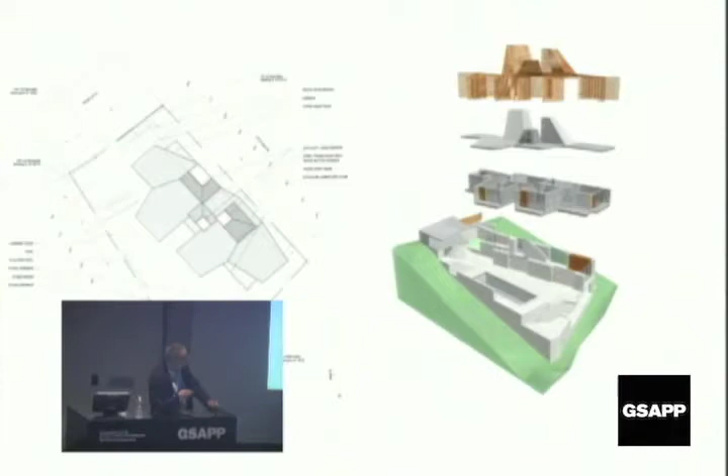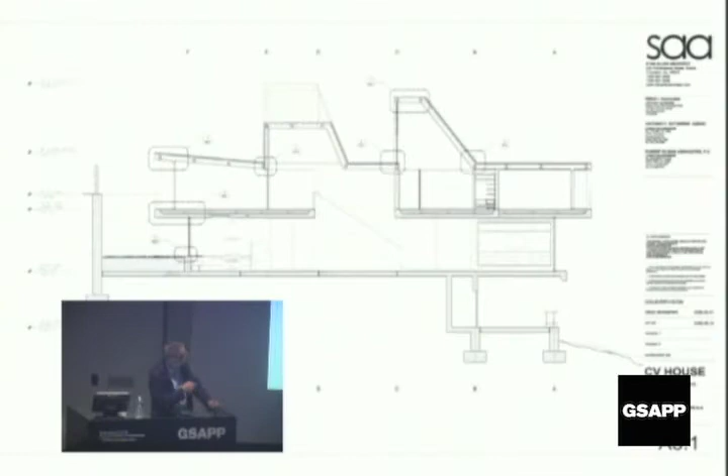The one thing that I will say about these projects, this is our house in Sagaponack from 2008, is this was coming off of the experience with landscape urbanism and the attention to the vertical, the kind of iconic presence of the building on the landscape, as opposed to seeing the building as an extension of the landscape, that was very important. This is an unbuilt house in the Philippines that was on a very steep site. You'd enter high. We created this intermediate level. And again, this kind of profile as you looked from the street was very, very important.

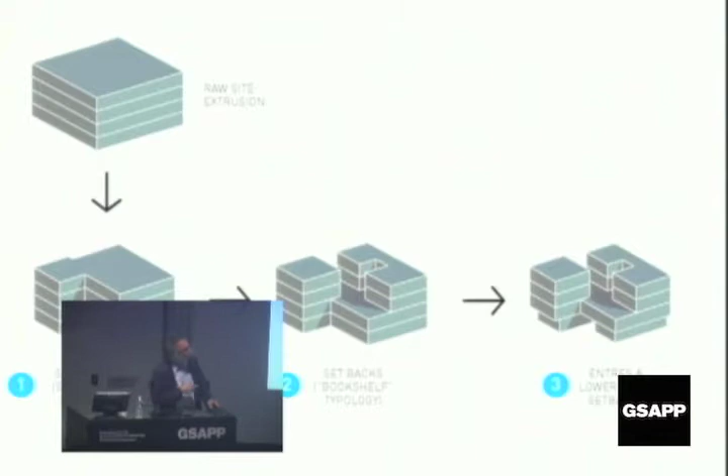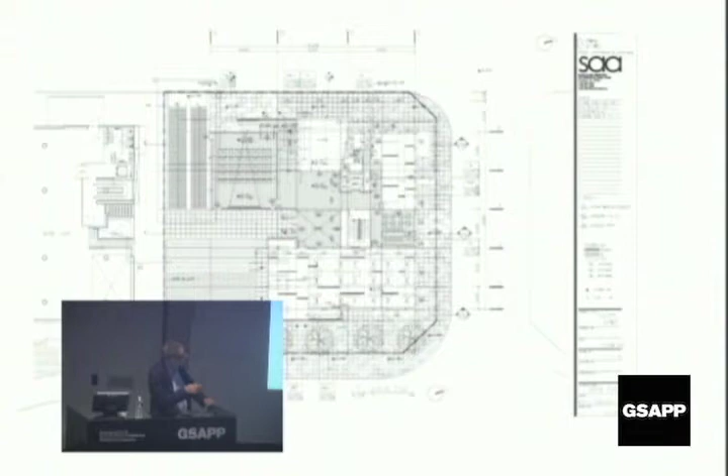Small office building that we did in Korea. And again, presenting this building in this context, you could almost see this as a process of erosion down to the final form of the building. One of the things we try and do, especially in an urban context, is not to enter at the perimeter of the building, but to bring people into the center of the building before you actually enter. So, for example, here you entered off the street this way from the courtyard here, and everyone came together absolutely at the center of the building.

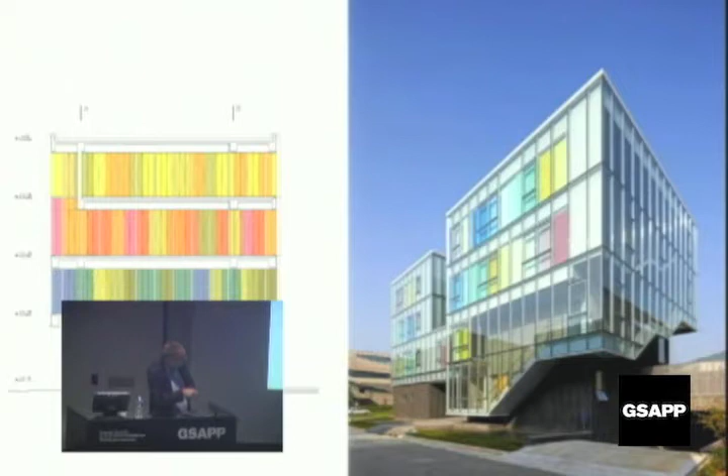It occurred to me as I was walking over here that the Mitchell/Giurgola building may be the source of my fascination with this kind of eroded staircase here. I used to walk by that every day, and that is one of the ways in which, again, a kind of erosion from the bottom up, where the heavy base gives way to the lightweight glass, and then the patterning of the color up here.

This is a small chapel that we did also in the Philippines. There's something nice about this building, which is that it's really less of a building and more of a pavilion. It has no glass in the windows. It has no air conditioning. And so in that sense, again, it has something of the quality of a piece of landscape. It doesn't have that strong sense of separation from the inside to the outside. The chapel is actually for a kind of orphanage, and it creates the kind of gateway to the campus, which is here, so it functions as a kind of marker of that entry.

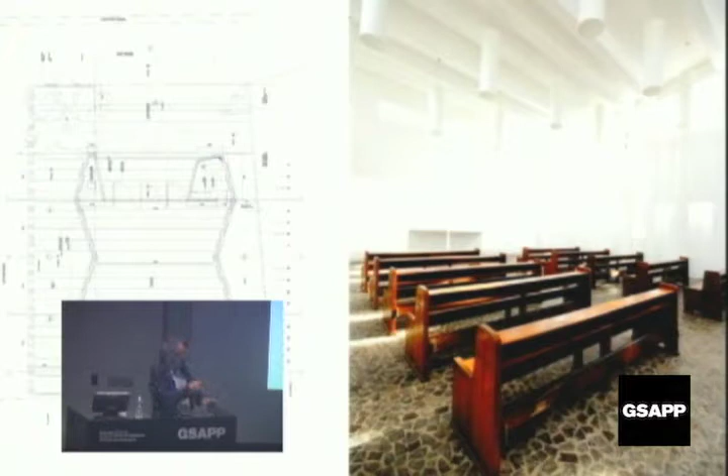And one of the things that was very important, because many of the children are disabled, was again to really minimize the difference between inside and outside. So it's a single line, really, which is bent back on itself. It's kinked for seismic resistance, loops back on itself, and creates the vestry by turning back on itself, and then leaves these very large openings here. And the paving on the inside is exactly the same as the paving on the outside. When it rains, the rain comes right in, you sweep the water out, so the interior has the feel of being continuous with the exterior.

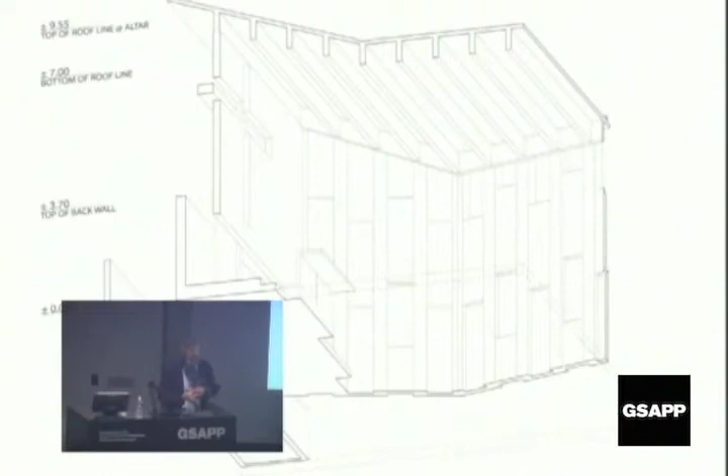And then the light is always brought in indirectly, working with the thickness of the walls to kind of filter and break the light, as I think is appropriate in the kind of tropical climate for that building.

So now this work with smaller scale public buildings was taking place at the same time as we continued to develop the work that initially had its start in the collaborative work that I did with Jim Corner, late 90s and early 2000s. And I'm only going to show one of these projects, really very quickly, in part to establish the context out of which the arguments around landform building emerged. Because it's really impossible to talk about landform building without talking about landscape urbanism, and that relationship of both dependence and difference between landscape urbanism and landscape architecture.

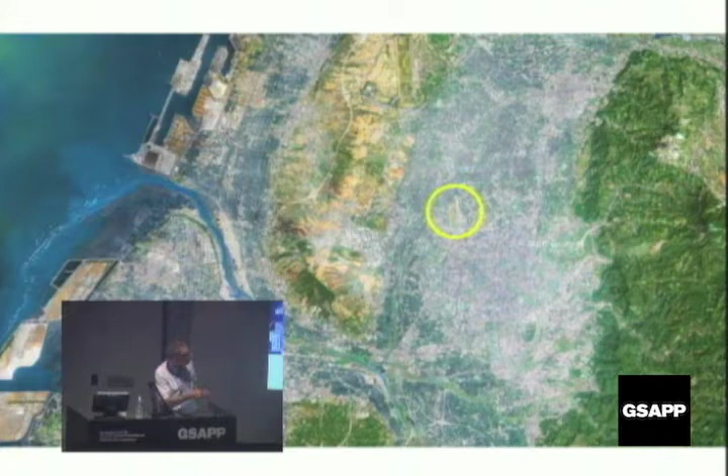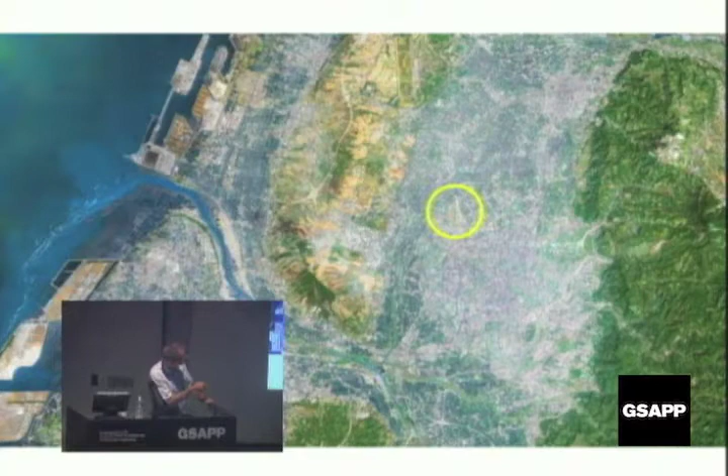Landscape urbanism and landform building. This was a master plan for an abandoned municipal airport in the city of Taichung, an hour south of Taipei on the high-speed railway. You can see the historic center of the city here. It grew radially. The old airport was subsumed by the city. They moved out to a new one, leaving a 240-hectare site, about as close as you could possibly get to a tabula rasa in the present day.

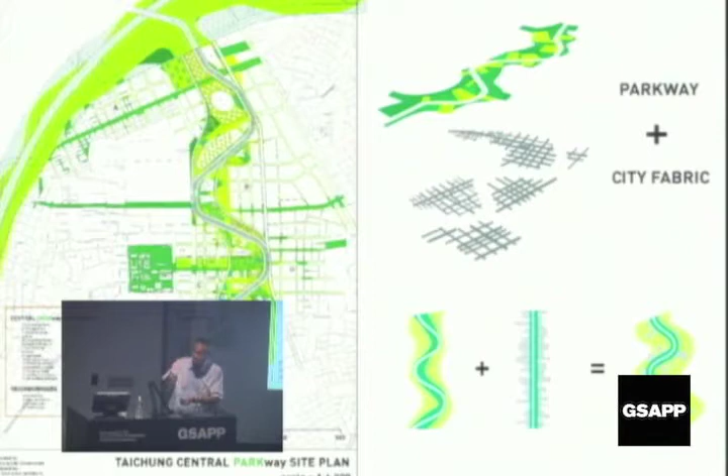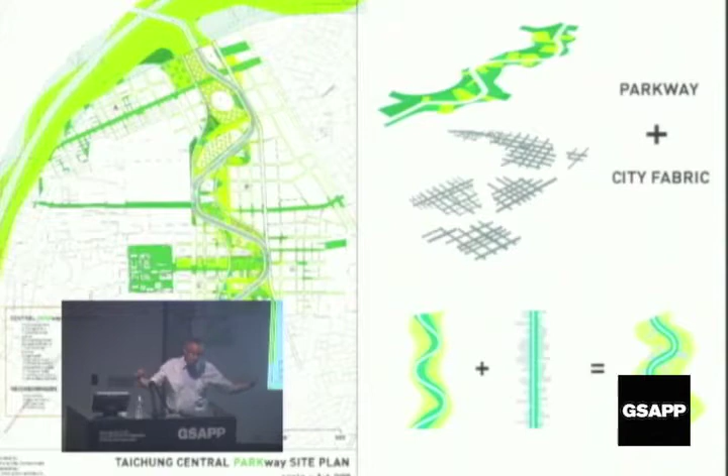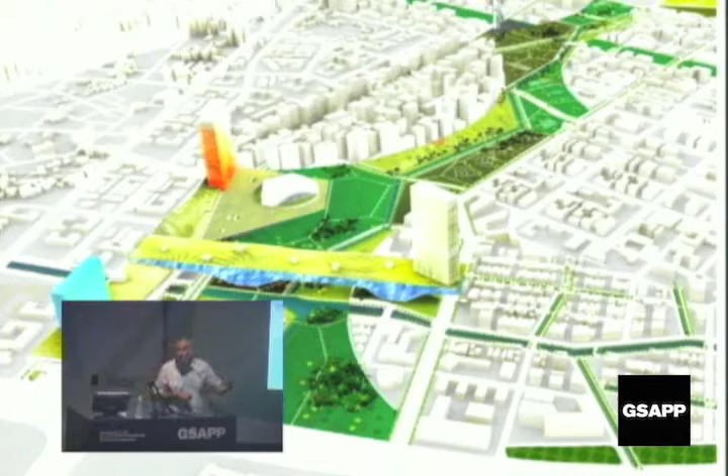Now, I'm not going to go into detail on the project, but part of the logic here was strategic, that we knew that the city could control two things. They could control infrastructure and open space. The city couldn't really control the built space. So basically, our attention went primarily into the design of the roadways in the park with the idea that the city would grow in to define that figure over time. And that would give the project an intrinsic flexibility depending on what happened over the possibly 10, 15 or 20 year period of realization.

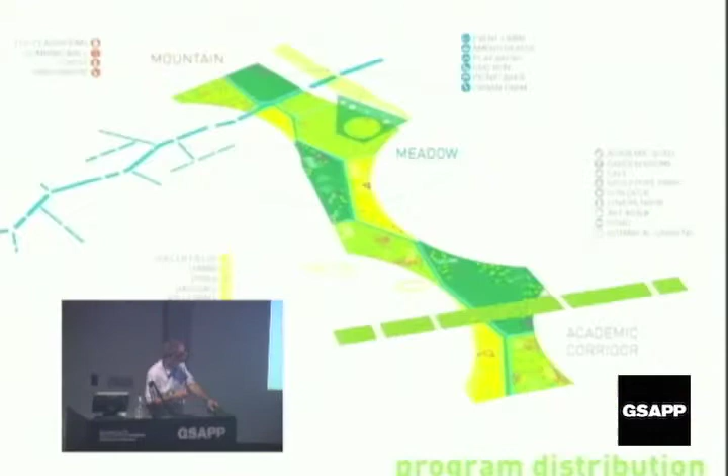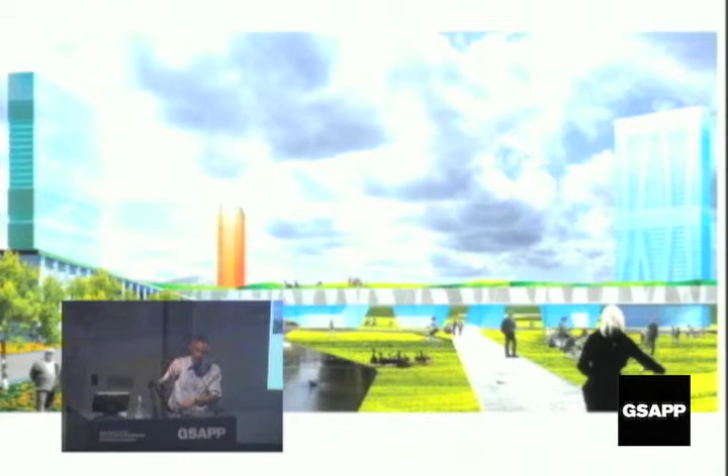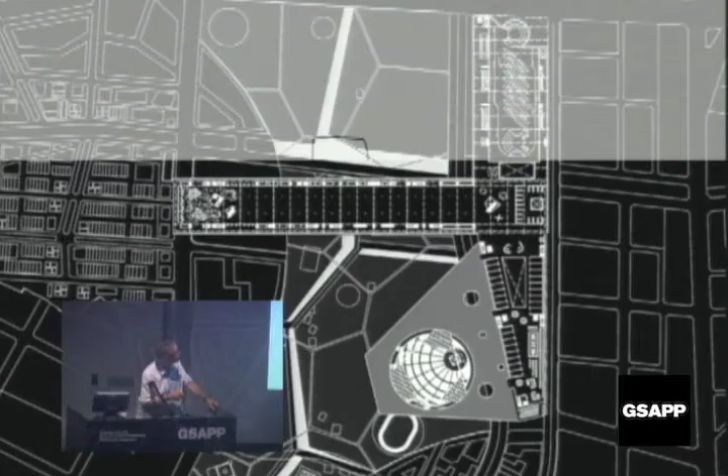Now, at the northern end of the site, there are a series of large-scale architectural pieces that create a kind of gateway and utilize, again, almost more of an infrastructural language, coming off of this famous quote by Rem Koolhaas, that you can't control the built, you can only control the void. And as I said, that means that the city that grows in can only be loosely controlled, and in fact it's controlled through more conventional strategies such as typologies and design guidelines and so on. This is that infrastructural piece at the northern end, which forms a kind of gateway which is visible from the highway as it goes by.

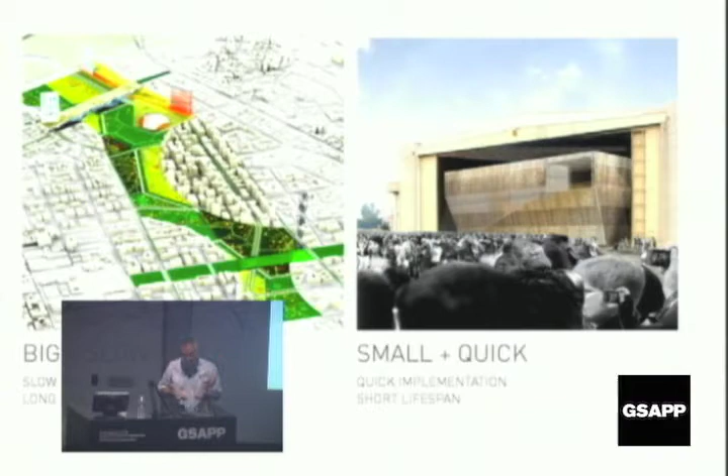Now, this was a kind of key project that took place right around the time of the Landform Building Conference, which is that the nature and, frankly, the frustration of these large-scale urban projects is this very long-term horizon of implementation. Minimum 10, possibly 15, even 20 years for this entire piece of the city to be built out. So we convinced the mayor that he ought to build something quick that would bring people onto the site, increase awareness of the project. They found some money, they approved the project, we started some sketches for a freestanding building.

One of those instances where not having a lot of budget worked in our favor. Too expensive to build a freestanding building. It's an abandoned airport. There was a nice hangar that was available. You get a sense of the scale from the tennis court. It has a strong concrete slab because they drove aircraft in, has very high ceilings, so you save on foundations, you save on the roof, and frankly for us, this idea that if it's a temporary building, it has to make its temporary quality thematic, coupled with the cultural resonances of bamboo in Asia, led us to this notion of the temporary bamboo pavilion inside the hangar.

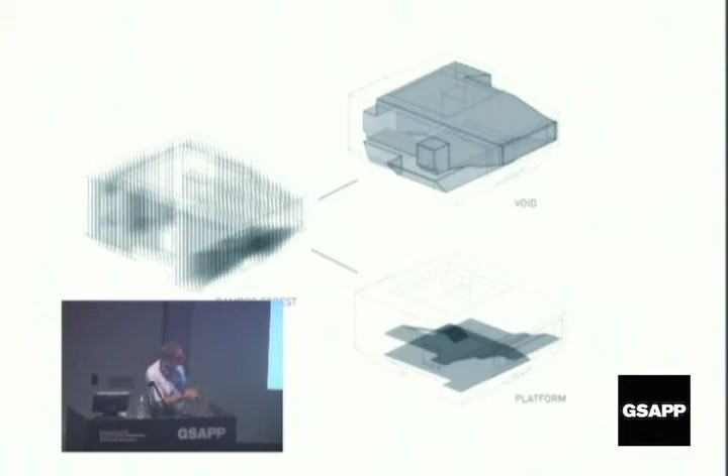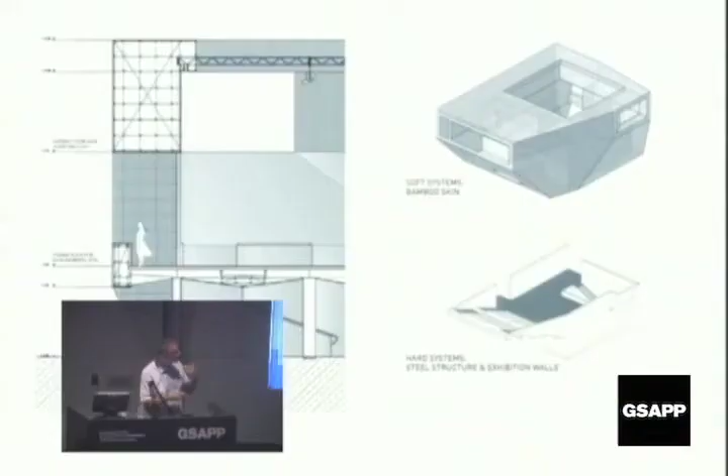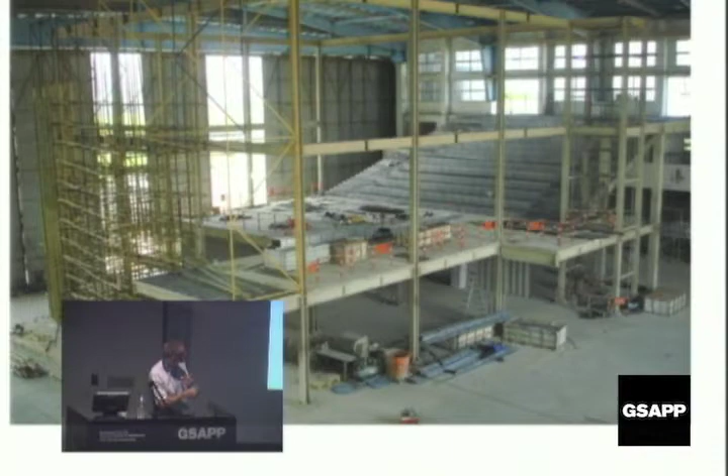So this idea that we basically create a dense bamboo forest, and we carve out an exhibition platform within that, and the structure uses the conventions of bamboo scaffolding that, of course, you see all over Asian cities, and then we create a kind of skin on top of the bamboo scaffolding, anywhere from 75 centimeters to 3 meters of bamboo that densely wrap this thing. So you have that sense of density and thickness. Turns out that for legal reasons, we needed to have a steel structure which supports the exhibition platform, and there you see that dense weave of bamboo that encircles the steel structure.

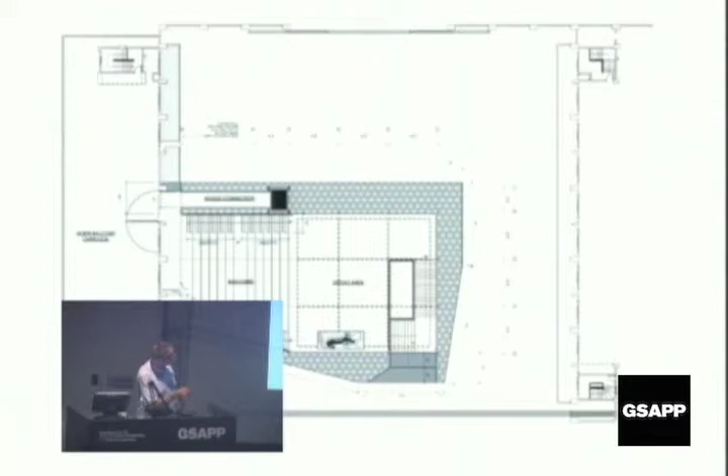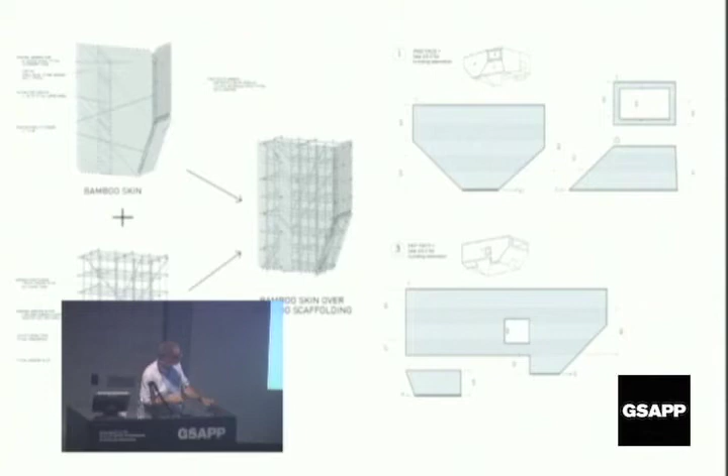So, shortly after we finished this, we were invited to do something at the Chengdu Biennial, and we basically built a very small version of it. With biennial pavilions, one of the things that always bothers me is the uninhabited quality of these things, that they potentially become kind of big sculptural objects. So we wanted our pavilion to be inhabited, so we created an aviary, and native bird species lived in the pavilion over the course of the time that it was up for the biennial.

All right, well, so let me briefly lay out the context of landscape urbanism. And these projects essentially give you the sense of the design work that was happening in the office at the time that these ideas about landform building were kind of cooking out of the stew of landscape urbanism. Well, we can get into some of this later.

Landscape urbanism is quite interesting because it really did emerge from the schools. Landscape urbanism came out of conferences, competitions, books, and essays before there were really a collection of practitioners of landscape urbanism. And as a consequence, of course, there's a very complete literature of landscape urbanism. So it's an interesting instance, I think, of the theory-practice relationship and that back and forth between speculative work, written work, and work in the field.

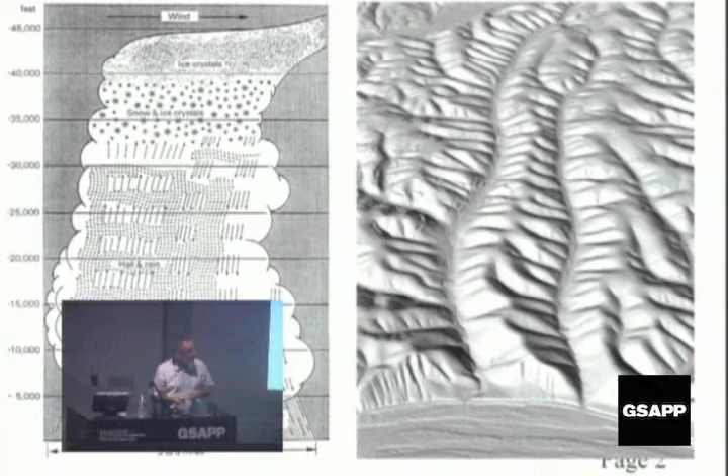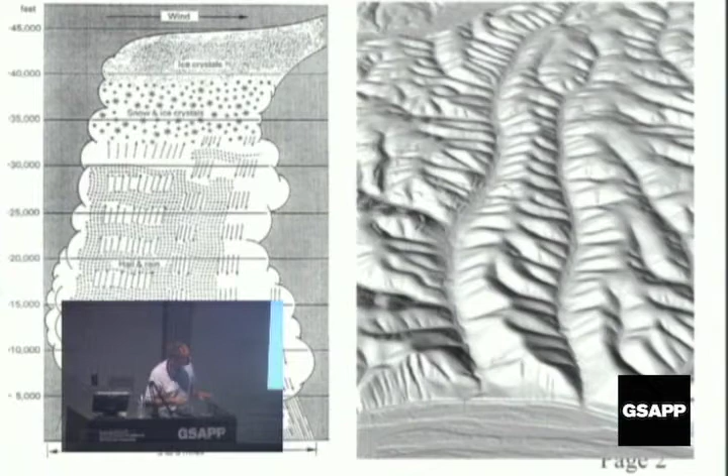This is a still from a geologist up at MIT called Taylor Perron, who basically writes scripts that simulate geological processes of evolution.

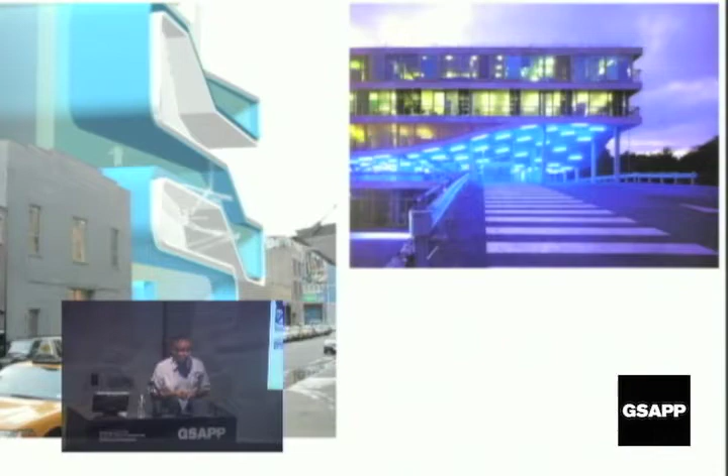So clearly a key project from that period that, in a sense, synthesized the architectural preoccupation with surfaces and the landscape interest in surfaces was the FOA Yokohama Port Terminal competition from about 1995, finished in 2001. And Yokohama is, of course, nothing more than a piece of built landscape. And it's specifically using landscape strategies, warped and folded surfaces, to comply with a kind of infrastructural mandate for the port terminal.

Now, there were also attempts to take that language, which, well, again, I could keep going forever, but in those early years at Columbia in the 1990s, Mark will remember this, there were a lot of studio projects for parking garages. There's a limited number of programs that a single surface can effectively deal with. And I think you begin to see that in these two examples.

Now, MVRDV's Villa VPRO is actually more or less the same time period as Yokohama, around 95, finished a little earlier. And part of the premise of the Villa VPRO is that you create a series of landscape-like surfaces within the depth of a very large office building. It's a kind of creative company, and that people will adapt the building to this sort of emergent social ecology of work in the space. So there's a very explicit kind of landscape analogy operating within an architectural context there.

Similarly with Diller Scofidio's, I don't know if it was Diller Scofidio Renfro by that time, but their Eyebeam competition, where there was an attempt to take the smooth connective properties of the single surface and fold them up into something that worked in a kind of dense urban context and had the vertical kind of iconic quality. It would be easy to collect many other examples, but this is somehow a kind of definitive one.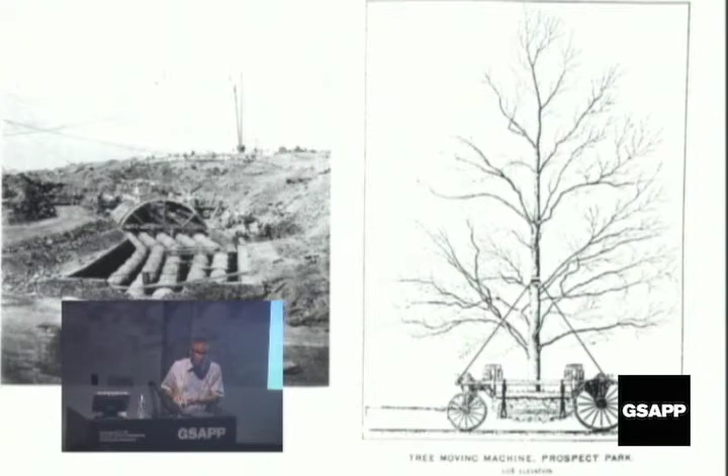And of course, the corollary to that, around the same time, Central Park: we think of it as a piece of nature, but it's a piece of civil engineering, basically. It's a completely constructed landscape. This is Central Park under construction. It simply uses different techniques.

One of the most important lessons in landscape for architects is this notion of change. Now, of course, there's the kind of obvious things like the daily change or seasonal change. This is the Asplund and Lewerentz Woodland Cemetery, which I actually visited for the first time last year. It's really extraordinary landscape. But I think more significantly, the ecological processes of succession as a model for change in architecture and urbanism.

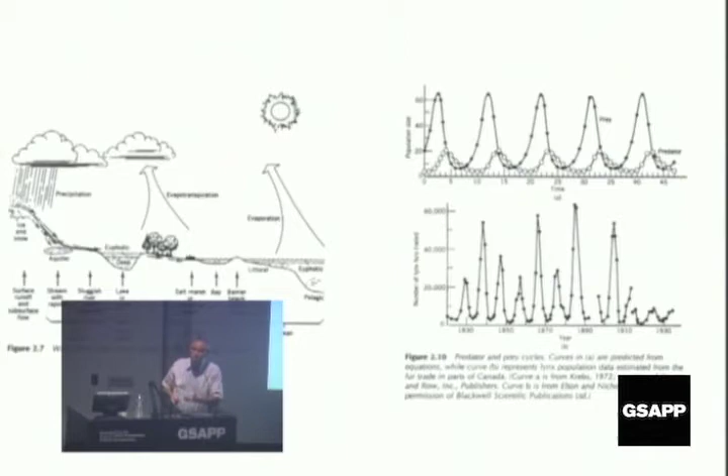Central Park, just to continue to use that example, has a yearly maintenance budget of $150,000 per acre. $150,000 a year per acre to basically maintain it in a steady state. Now, a lot of ambitious and interesting young architects said, well, what if instead of maintaining our landscapes in a steady state, you actually trigger processes of change and succession in a landscape? And that the city, too, changes over time in processes that have a kind of parallel to ecology and evolution.

This notion, again, that the extended horizontal surface is a kind of privileged territory for open-ended, indeterminate programming that can be steered in certain directions but not scripted directly. And then finally, again, to reiterate that notion of the surface as a kind of performative entity.

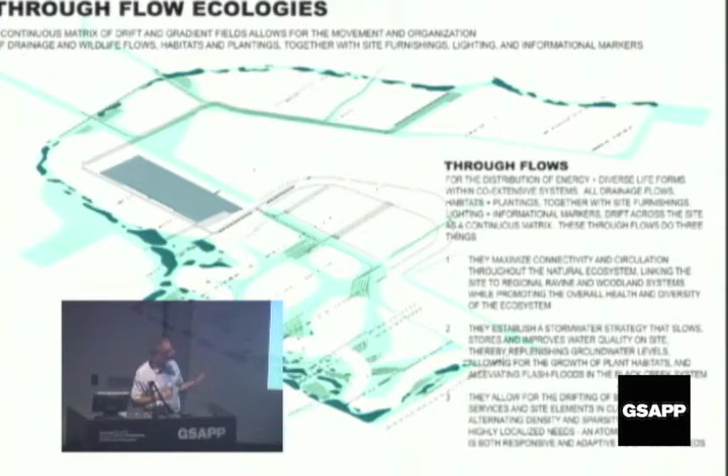Jim Corner used to say, I suppose he still does say, that you need to look at the landscape through the eyes of a farmer. So that just as a farmer intuitively knows where the wet areas are, how the different sun exposures will affect the way that the landscape supports life, we can start thinking in similar kind of terms. So in one of the first projects that Jim and I did together, we very consciously sculpted the landscape to create those kind of performative surface conditions.

And again, to bring it back to architecture, right around that time, projects that came very much out of the Columbia context of the 1990s. This is Reiser Umemoto's West Side project from about 97, 98. And again, you see almost kind of agricultural furrows brought up to the scale of a large piece of urban infrastructure, and then reflected again at a much smaller scale 10 years later in the High Line. So again, the circle kind of closes there.

And finally, to mention that infrastructural scale, the notion of seeing the city in terms of speeds of movement, pockets of stasis, the analogy between that and large-scale network systems, and of course the way in which infrastructure works in a networked fashion as well. I would argue, and again, this is setting the stage for the landform building material, that beginning around 1998, you had conferences, books, competition projects, speculative projects, all around the theme of landscape urbanism. By 10, 12 years later, I think you have two definitive built projects in landscape urbanism, one of which is the High Line. You're all very familiar with that.

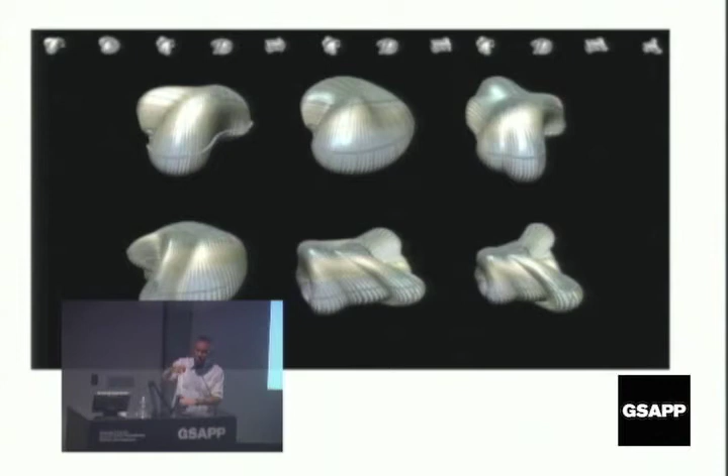I think this is important. This is again where I think he can claim to be biological as opposed to biomorphic. He's not simply imitating natural form. His claim is that he's imitating the processes of natural form generation. So again, we can talk about that.

So again, my counter proposition is that we shift our attention slightly to the geological, and even borrowing, as we did in the book, the geomorphic language of process, so that we created a graphic index where these operations from geology, from landform building as a verb, were borrowed to categorize some of the projects that we showed in the book.

And then thirdly, to rewrite the kind of genealogy, in particular going back to projects typically from the 1960s, Jean Renaudie, these terraced apartments in Paris, to maybe look at some overlooked sources and write a kind of longer genealogy of landform building.

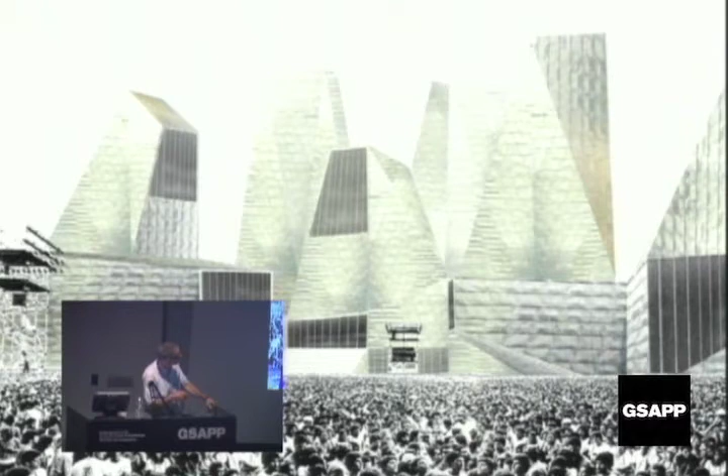All right, well, I'm going to sort of assume that people are familiar with the book, and having given that introduction, I won't go into too much detail here, just sort of quickly running through these four categories. This is Gottfried Böhm's Church, Moneo's Kursaal, Mansilla + Tuñón's Museum of Immigration in Algeciras, which is of course very closely related to a project of theirs where these forms were very specifically mimicking the forms of the mountain.

It was interesting as we were putting the book together, Mazzanti's library in Medellin, and he really does talk about this as a piece of geology. And I think in part, the notion that in this incredibly tough social environment that the building occupies, the resistance of the geological as a kind of tough response to that neighborhood that then would, in a sense, create a new platform for the social life of the neighborhood becomes a kind of important question.

A series of curated contributions from artists, including a series of found photographs from Tacita Dean. So all of these were either postcards or photographs, which she found in flea markets in Berlin. She, of course, thinks in series, so the order was very important. And I think another thing which for me comes out of these is a kind of formlessness to the language of accumulation in the ice and snow.

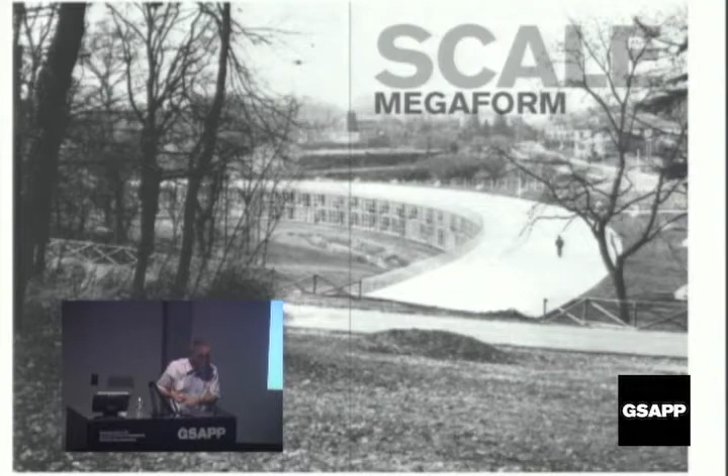As we thought about the large scale, the very important point of reference was Kenneth Frampton's 1999 essay, Megaform as Urban Landscape. And that essay was out of print at the time, and so we reprinted the essay. Frampton's megaform is a conscious response to the megastructure. You could see this famous Hans Hollein collage of the aircraft carrier in the landscape. Here, you have a very strong contrast between a technological object inserted into a natural landscape.

And part of the claim of the megaform is that you can deploy that large scale, but through organizational and design devices that in particular tend to work in section, you can kind of mediate that relationship between the very large-scale object and its context. And I think Steven Holl's Vanke Center is probably one of the best examples of that. This is a building that is as long as the Empire State Building is tall, laid down on the landscape.

And of course, part of the claim of the project is that in this particular site, between the mountains and the sea here, to accommodate the program in a series of towers would have created a kind of barrier, whereas the building itself creates this kind of open landscape field with horizontal connections that allow a kind of transparency.

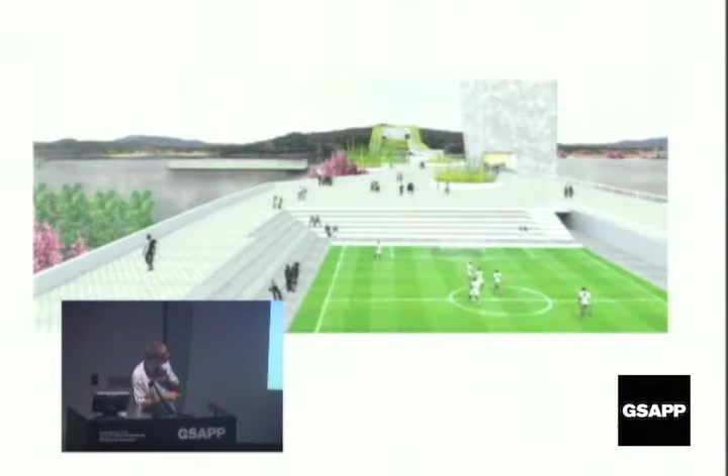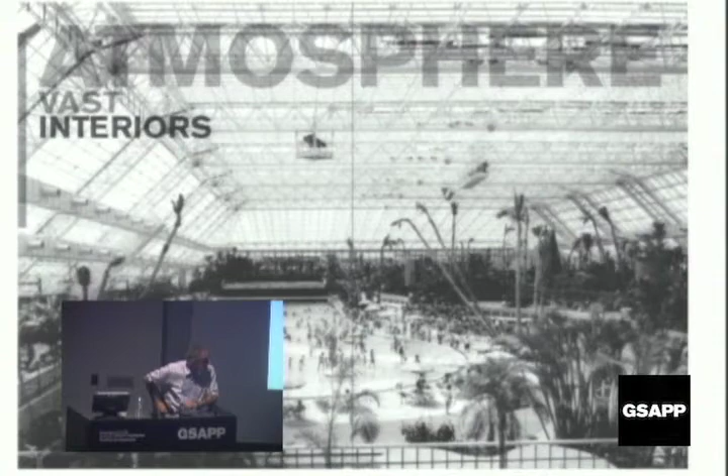The notion of the vast interior, I think, became very important to us for two reasons, really. The first is the idea that we could think of the landform as something experiential, not something you looked at. One of the characteristics of landscapes is that you don't look at a landscape. Landscape surrounds you. Landscape is an immersive phenomenon. So this helped us get away from the kind of object-based notion of landscape.

And it also, quite frankly, is very much an experience of the contemporary city. The large interlinked artificial interiors, or in an architectural context, interiors that are so large that they take on the quality of an exterior space. One of my favorite buildings, Vilanova Artigas's architecture faculty in São Paulo, of course taken during the student protests of the 1970s. So you really do see this piece of architecture functioning like a kind of public plaza, public space.

And of course the architect's fascination with the atmospheric, from Diller Scofidio again to Philippe Rahm, and the notion that if we have an expanded notion of landform, well, the vast open field of the desert is also a form. We again published an out-of-print chapter from Reyner Banham's Scenes in America Deserta. SANAA, Sejima and Nishizawa, obviously, with their preoccupation with constructed atmospheric spaces, and Ishigami's library, the experience of which is, again, a kind of immersive experience of moving through the forest interior as forest.

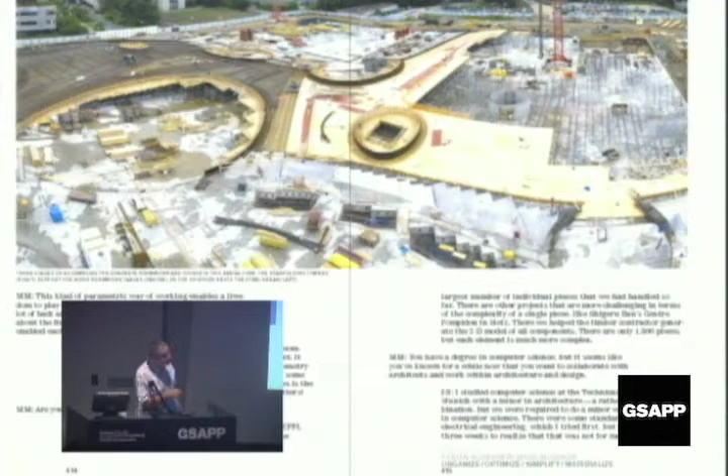And of course, SANAA's EPFL is an important point of reference here. But again, we wanted to present this building in a way that it hadn't been presented. So rather than the usual photographs that the architects publish, we went to the engineers and to the fabrication consultants, to Fabian Scheurer and Design to Production, who did all of the formwork for the building, and to Bollinger and Grohmann, the engineers, so that you see the technological infrastructure necessary to create the smooth landscape forms, or to show the building under construction.

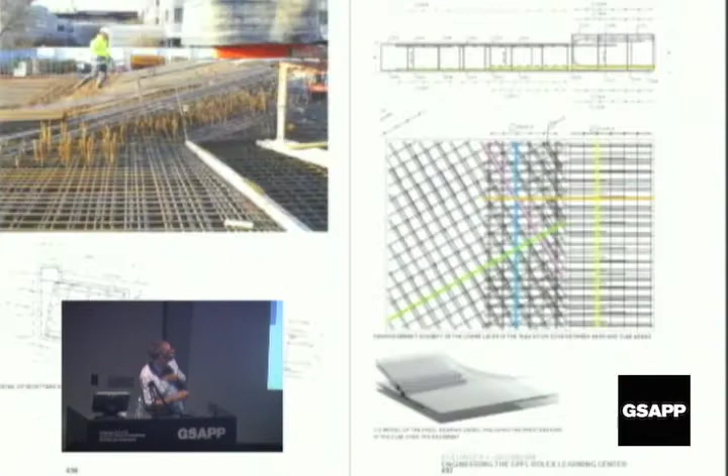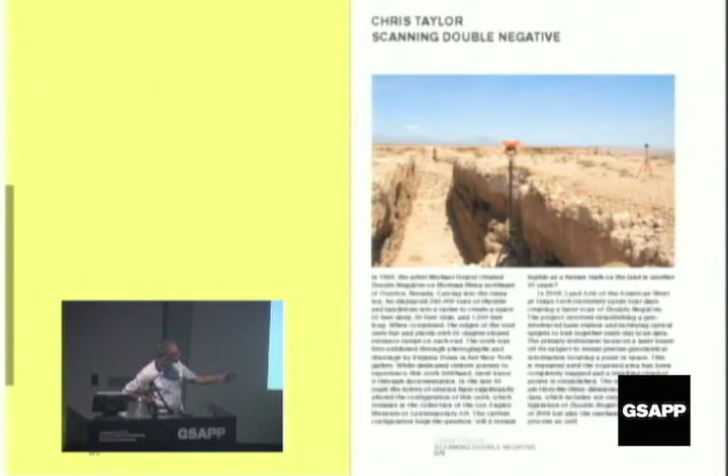We showed some work of a geologist from Princeton who works with digital visualizers, and then a friend of mine who runs a program called Land Arts of the American West that did this digital scan of Michael Heizer's Double Negative. You can see their equipment set up here.

I'm going to go really, really fast through 3 projects, and I'm going to show one project in a little bit more detail so we can leave time for discussion. How does that sound? And we can talk about this.

Because again, what preceded all of this, in a way, and again, it's Columbia University history, is my own interest in field conditions. That's the Swedish translation. Again, we can maybe get into this in the discussion, but the proposition of field conditions is that you create difference by the accumulation of small scale differences among a field of elements that are roughly similar. So it's a production of difference, if you will, from the bottom up rather than from the top down.

And there are, of course, good architectural examples, Melnikov and Le Corbusier, and then the diagram is also important in here, and we talk about that. Okay. This I'm not going to show in detail, but this is a project where that field conditions notion kind of returned as a strategy to deal with a particular competition brief. This was an art museum for the city of Maribor in Slovenia, beautifully preserved Eastern European city.

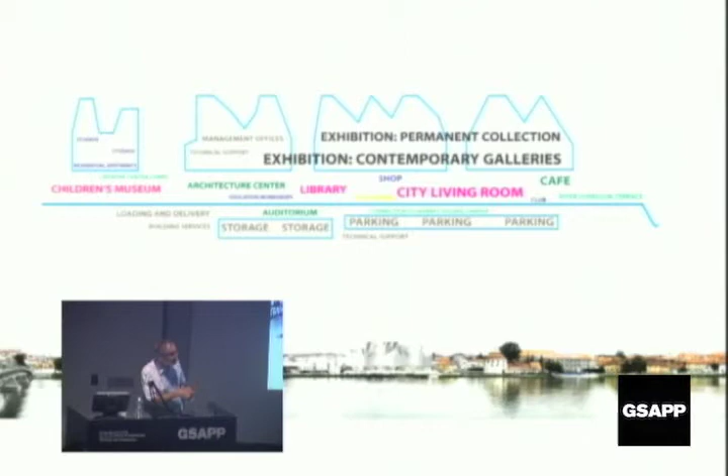So that sort of part-to-whole aggregation strategy became a way to both create the new image of the museum, at the same time respecting the kind of grain of that existing city through a repeated kind of strategy of aggregation. There was also a programmatic dimension to that, as is quite typical in museums, there were large-scale public programs, yet the galleries themselves also need a certain modularity, a certain rhythm to create the kind of curatorial narrative.

So, non-centralized expansive systems capable of becoming specific at each point, which was a phrase that Emilio Tuñón and Luis Mansilla used at one point. These are some very early sketches about those sort of part-whole, something that Ed Eigen sent me, speciation. I mean, this is the Linnaean diagram, right? Basically arbitrary boundaries within a continuous field. Here you create archipelagos that don't interact. And obviously the two interesting ones are these, where you both have specific spaces and locations, yet everything is interconnected. And this sketch was what inspired Ed to send me this, so obviously that was very much in the thinking.

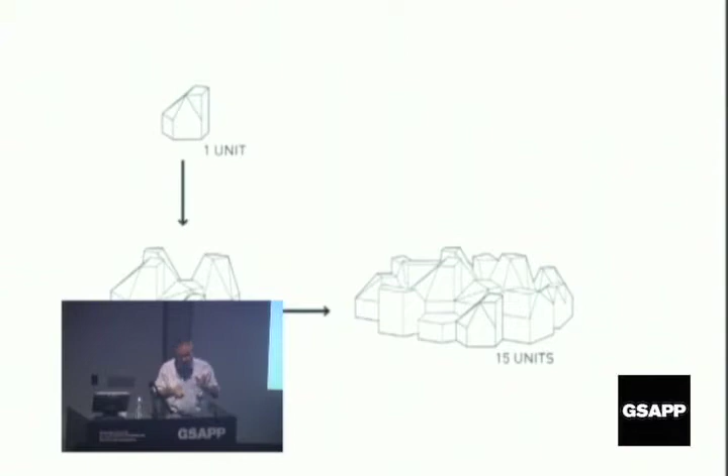So the key thing here is using those sort of part-to-whole strategies of aggregation here with a series of units, each of which have an identical plan that, as they're put together, both make a kind of identifiable whole as the kind of image of the institution, yet you can trace back the individual piece and use that to create that relationship without a kind of contextual mimesis, so that it fits into the existing city without a huge jump of scale.

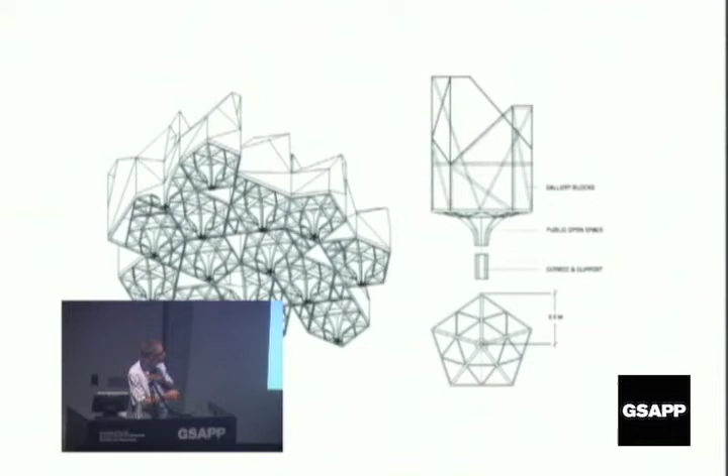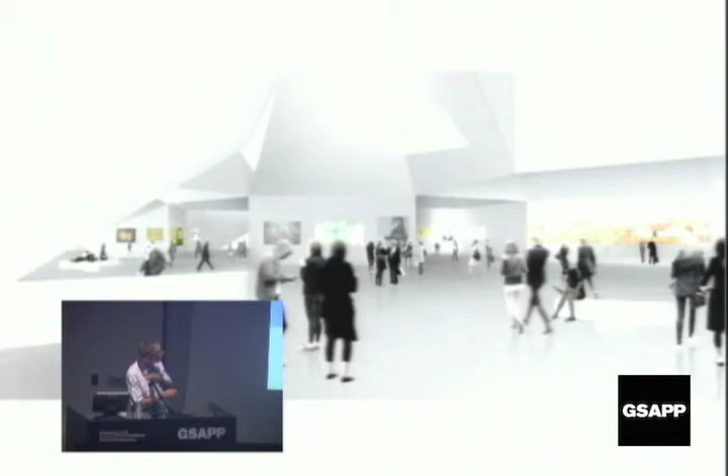So I'm just going to scroll through those. Each one is lifted up. You can see the plan is identical. They're all pentagons, and then together they make a kind of continuous lattice. This is the way they're lifted up. Galleries above there, lower level, entry, the galleries where you have the kind of very active skylights, and then a smaller scale up above. Okay, so there's a logic to the strategy of aggregation in the Maribor project.

The next competition we did was for an opera house. If there's anything less field-like, it's an opera house. Opera is all about focused, concentrated attention, spectacle, excess, and so on. So it seemed an interesting exercise to see if we could use the kind of aggregation strategy here. Also, it had to do with, this is the kind of strange thing that comes up in contemporary practice.

Our working metaphor, again, these are the post-landform building projects, was this notion from geology. An erratic is basically a rock that's in the wrong place, brought there by a glacier, by erosion, or something like that. So our idea that we're working between the mountain, the city, and the sea, it's like a piece of the mountain migrated out here between the city and the sea. So again, just the contextual things here.

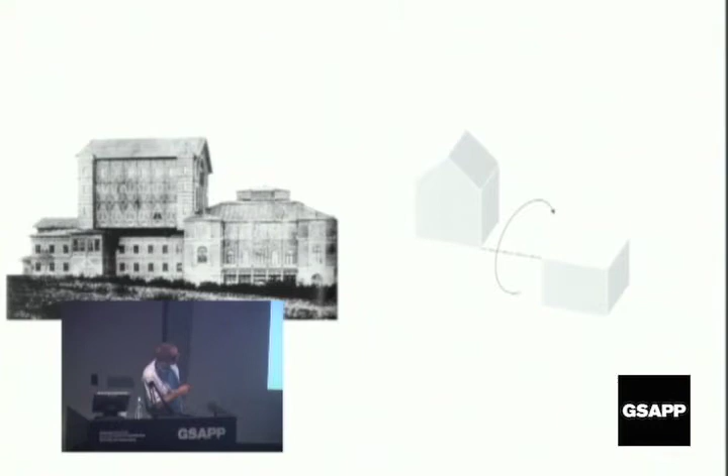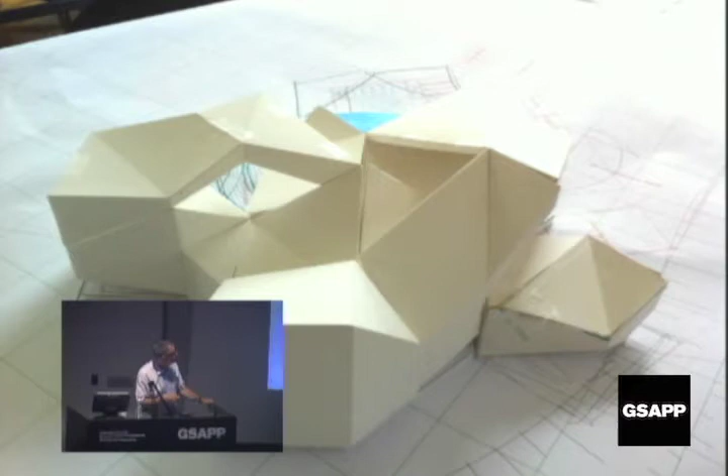Of course, the other iconic opera house is Bayreuth. We liked this little Monopoly house here, and we realized that Monopoly house, you turn it on its side, it's a pentagon. So that became our kind of working piece here. You start aggregating these pieces. At a certain point, you get a larger piece that accommodates the auditorium, all of the back of house stuff. And this was our basic working plan diagram and early study model.

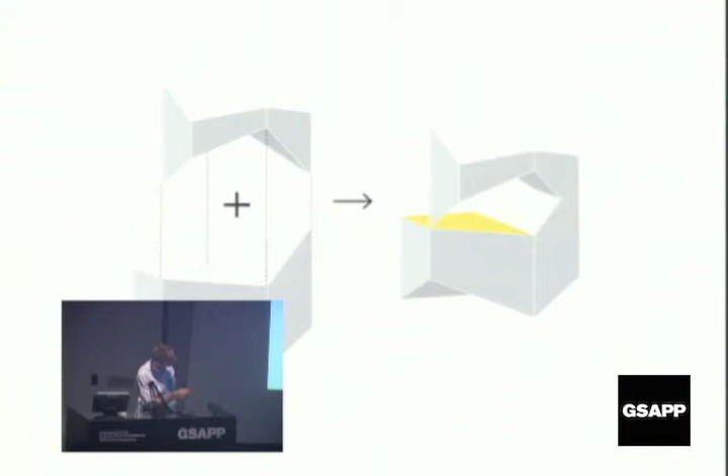Now, each of those Monopoly houses on its side are pulled and stretched, and then there's a secondary operation where it's duplicated, rotated 90 degrees, which allows us to occupy the middle zone of the project like this. So again, this notion that individual pieces come together to make, in this case, a whole where the parts are less identifiable, but they are still present.

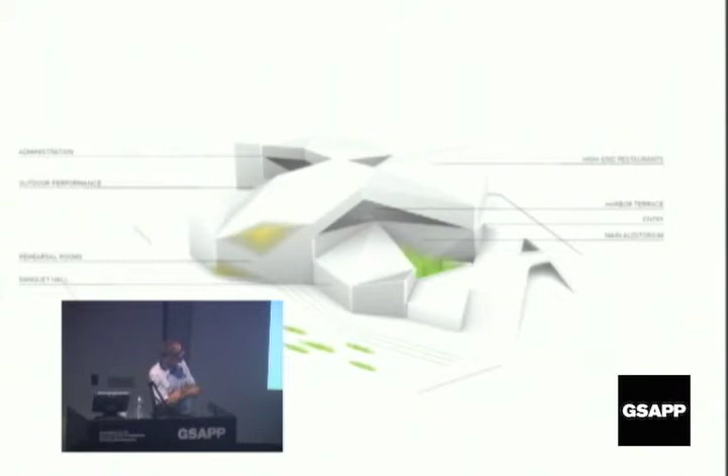So this assembly of our working sketch model, you can see the separateness, the individuality of those pieces, and this operation of twisting that creates those higher up voids, yet the artifact that results doesn't necessarily register that part to whole relationship in such an explicit way. The other point here is simply that the complex whole that results here is a reflection of the complexity of the program itself.

The foyer, and then at the upper level, these occupiable spaces that allow you to look back at the sea or the city. Now, we didn't win that competition, which is always a little frustrating. But we're building a piece of it.

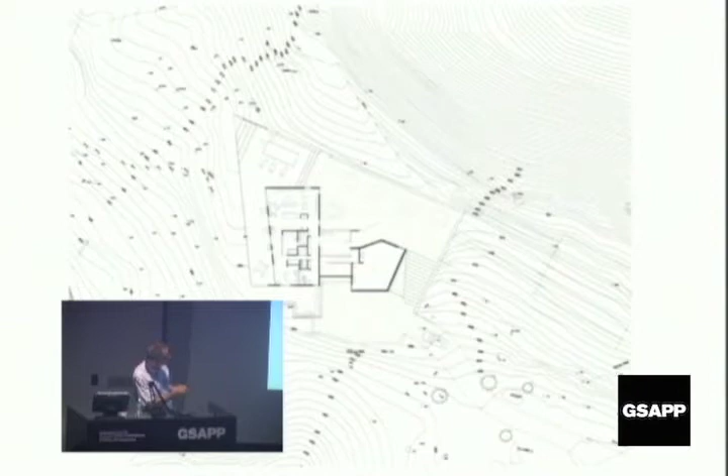This is a house I built 10 years ago in upstate New York. That's the existing house, we are now adding on to it. And you see, this is a pentagon. It's a studio for the client, and then we're using it as an opportunity to rework the landscape.

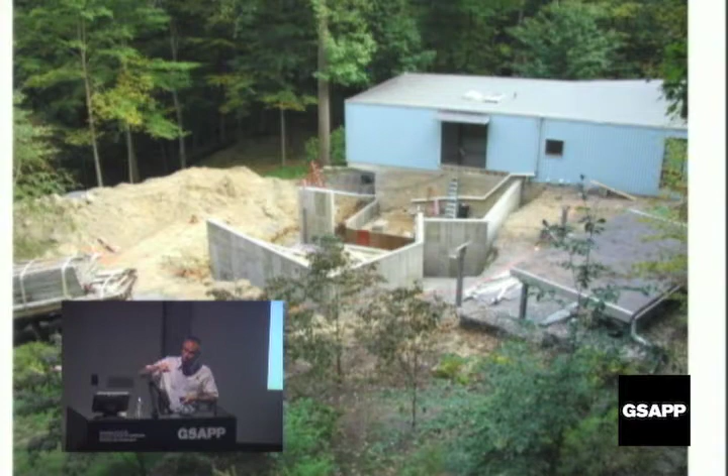But basically that pentagonal form actually turns out to ideally suit this particular artist because she works with projection. And one of the interesting things about the pentagon is it's the simplest form that is a kind of dynamic form. By adding one side to the stable form of the square, you destabilize the square, but without making it over complex. So here's this project. It's pretty much finished. We're waiting on the landscape.

Okay, last project, I promise. And I told you it was a little project heavy. But the excuse is this is the most geological of the projects. So this is a competition we just finished, an invited competition for a monument to freedom and equality in Leipzig. They're building these in Germany, and in this particular case, it commemorates the events of the fall of 1989 in Leipzig.

The center of the city was bombed quite heavily in the war, and our site is immediately outside the first ring. So what was at one time a very coherent urban space now looks like this, the formless space of contemporary urbanity. Ringed, though, interestingly enough, by institutions, the Stadtbibliothek and the Neue Rathaus, but then with this piece of infrastructure running through it. So it actually leaves very little space for a conventional urban response.

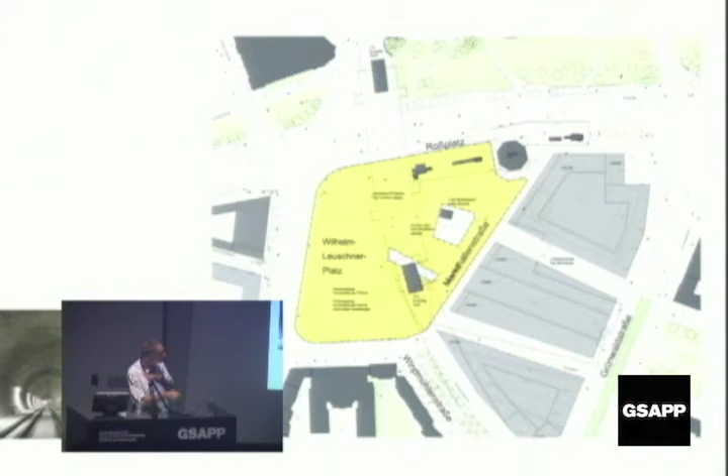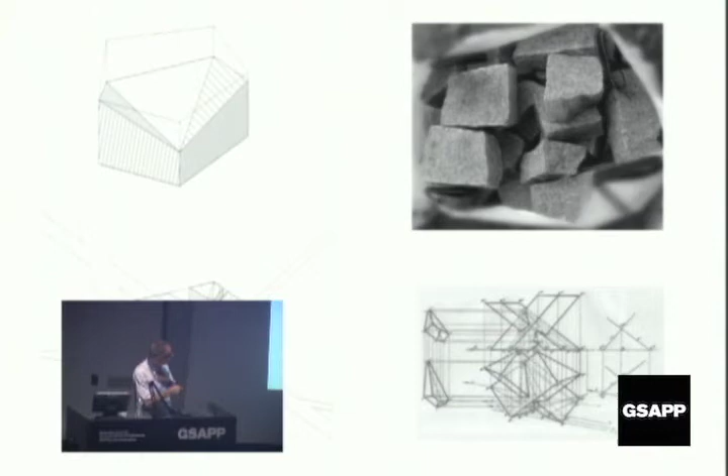this was the given site, and in fact we could not occupy any of the territory above the subway line. And the study models here, with this notion of creating a kind of village of forms, a multiplicity of forms. But then how do we achieve that? We achieve that through a series of operations that belong to the history of the discipline, specifically operations of projection and stereotomy. So we start again with a pentagon. We're kind of preoccupied with that form, which is then distorted, cut, deformed, subtracted. Deformation, cutting, subtraction, and translation are the four operations here.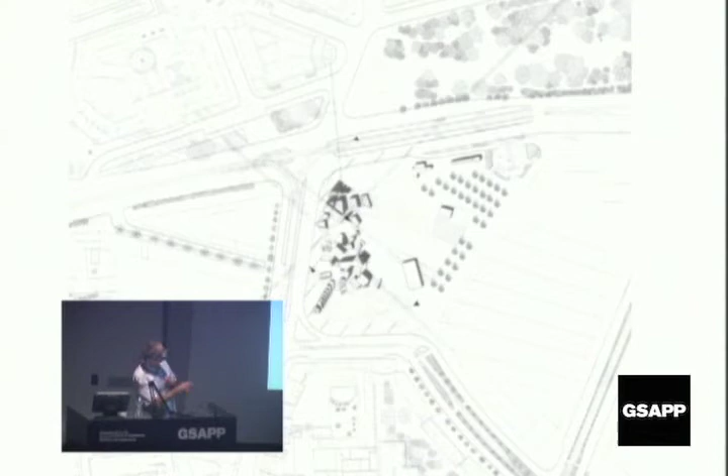So that in fact, it would be possible to completely reconstruct the two initial solids from all of the pieces that are on site. Yet, hopefully, we've captured that moment of ambiguity between a whole that's being taken apart or some new whole that's being constructed out of those pieces. This is the plan. You can see that there's really only a very small portion of the site that's occupiable, the scatter of forms, which is then related to a series of axes that pick up some of those monuments, both new and old.

So here is the axonometric view of the piece being taken apart, and then creating all of these opportunities. I think the other important thing about a monument today is that it really has to be experienced both as a special commemorative occasion, but also as part of everyday life. So again, there's a notion here that as the thing is broken down into these parts, it has this potential for different kinds of uses, for informal performances and so on.

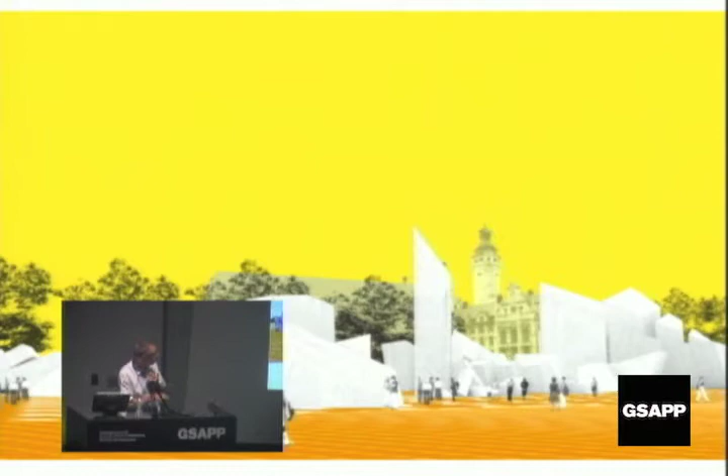So from the city looking towards the site, we have a very conventional, monumental, pyramidal profile, and then again, the informality of the pieces close up and local, and then from the site looking back to the city, we have a field of fragments here. Sometimes you can reconstruct those specific operations. These are these axes, but again, that axis is also blocked by this piece which has shifted into the axis. So here, the model collaged into the existing site, future buildings proposed here and here.

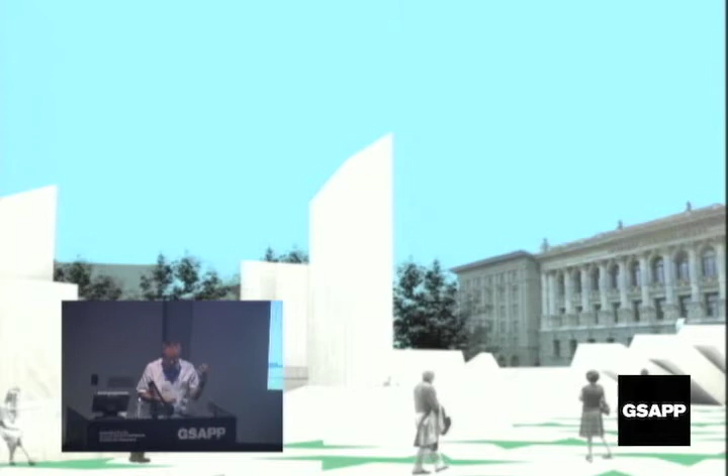And again, as you come up close, of course, this stony geological language is really the dominant language that operates both with a vertical, iconic, monumental image here, yet allows this more intimate, more informal engagement with the monument itself. So that's the last image. Thank you. So I didn't quite eat up all of the time, but it was a bit more of the conventional hour-long lecture.

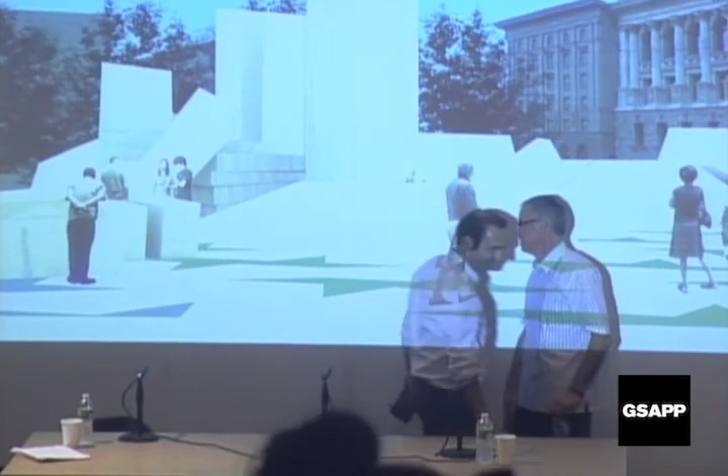You want me in the middle? You're going to get it from both sides. Come on. You know, the format that we're following is that we begin the conversation. Good. We do the conversation, then we pass it on. Sure. We just have a little bit more. A little more, yeah. We're going to move forward. Short conversation amongst us, and then just pass it on. Good. We have a full house, so it's a good opportunity.

Okay. Now we're down to the hardcore. So I'm going to pass the word to my colleague Pep for him to start with the first question. Okay, I'm going to begin. I've seen this presentation a few times. I'm going to ask you about the book first. Sure.

The more I think about the book, the more I'm surprised about the role of technology within the book. It's almost absent except for those moments of fabrication, where you are really advocating for a kind of atmospheric effect within the vast interiors you are describing. But one possible answer to that omission, knowing your background and how much you are interested in issues of technology, is that for you, and perhaps it's not a coincidence that Aldo Rossi appears, the role of technology is similar to the role of typology in Aldo Rossi.